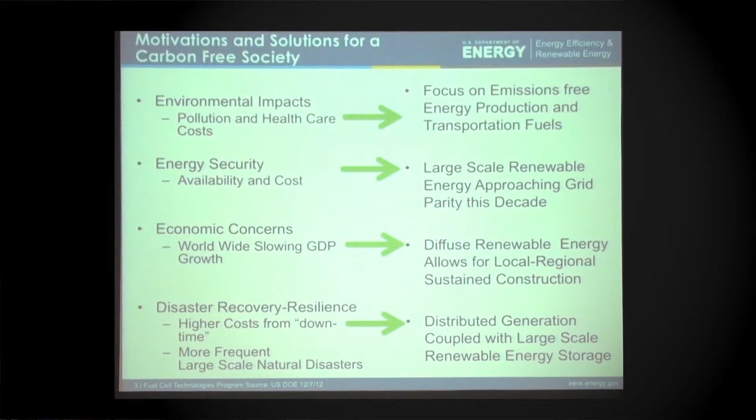Recently, the US has dealt with this as well at a much smaller scale with Hurricane Sandy. We had a couple days where we were out of work at DOE. We had a lot of subways submerged with water in New York, and estimates were upwards of $30 billion in damage. So when you think about disaster recovery and resiliency, it's really important to balance that short-term economic gain with a longer-term view of the future.

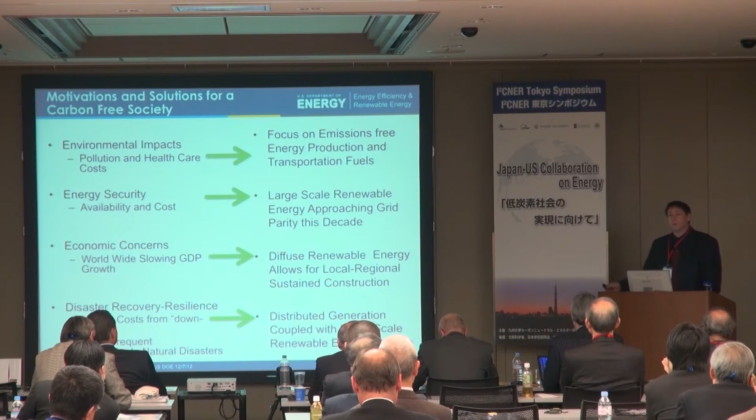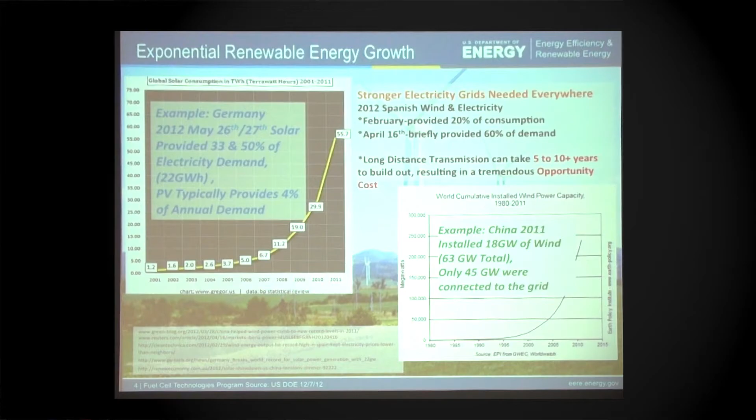Wind energy is growing so fast that it's really difficult to keep it connected. In China last year, there were 60 gigawatts of wind put in, but they were only able to connect 45 gigawatts. So you really need this analysis that's happening at I²CNER, that we're doing at DOE, and I'll talk about this grid integration later, in order to match that growth so it can be as efficient as possible.

But I think as people in this room think about it, there's going to be a lot more headlines about how fast we're moving towards renewable energy.

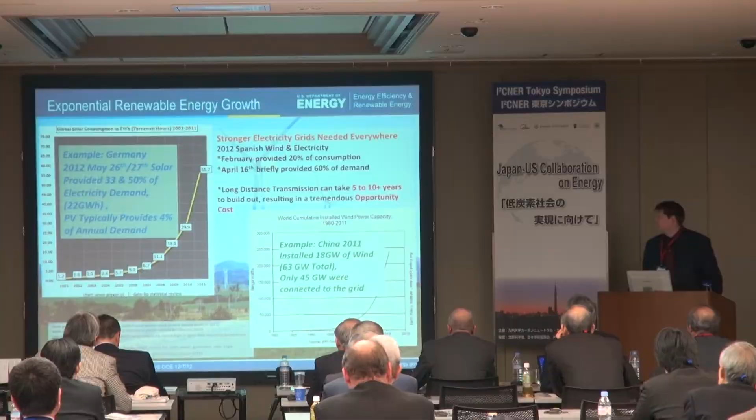In the last 5 years or so within the US, we have a tremendous amount of wind resources in the Midwest, and we've just begun to tap that. You can see here in about 5 years, we've had a 100 terawatt hour increase. This is not capacity where you divide by 5 to get what it actually is—this is real electricity produced. If you were to look at the number of nuclear power plants needed to be built in that same time frame, you'd have 7 2-gigawatt nuclear power plants.

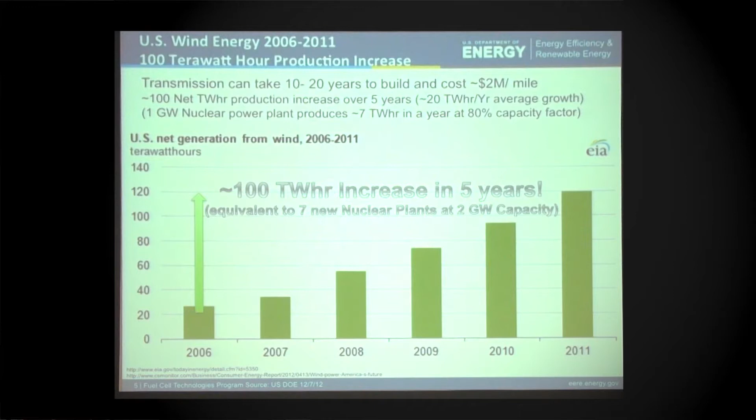I think it's been almost 30 years since we've had a new nuclear power plant, though there are licenses and some going in Georgia and so on. But this kind of shows you the rate that renewable energy can grow when you have just some minor policy support.

So looking at wind in Japan, you can see in Hokkaido there's a tremendous amount of wind. This is a slide from Dr. Ushiyama-san. He talked at this JREF Foundation in March of this year. But if you look at METI's fairly conservative estimate, going from almost 3,000 total gigawatts of potential, down to about 40 or 50 gigawatts—this is trying to understand where can those windmills go, what's reasonable from a societal point of view, if you're looking at offshore and onshore.

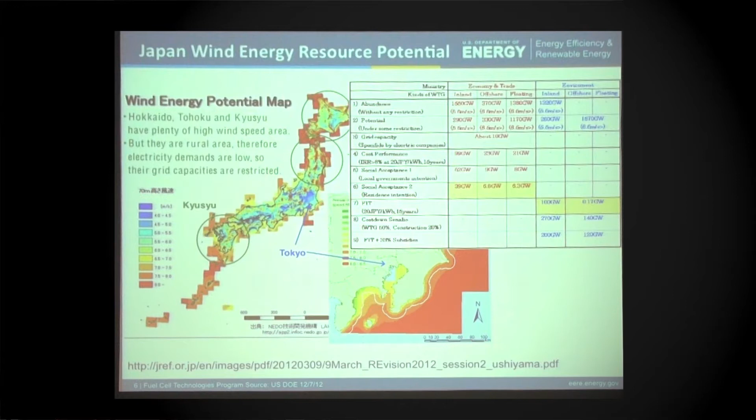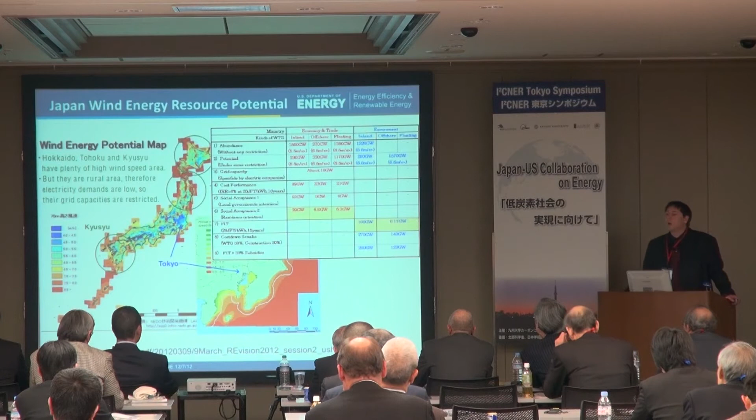And then the Ministry of Environment was a little bit more aggressive, factoring in some of the feed-in tariffs that can really accelerate that introduction, and there's upwards of 300 gigawatts of potential available. So I think Japan has a lot of wind resources. There's a lot of pumped hydro here, more than anywhere else in the world, with 27 gigawatts of energy storage. I think it needs to be considered as there's this thinking about moving towards your energy mix and how you can do it at the lowest cost.

I think in the previous 10 years, there was about a 1% increase in renewable energy, so you're getting a 10 times increase from a single policy that's well thought out. This next few months, it's going to be interesting to see where the cost committee puts those feed-in tariffs and how much they might come down.

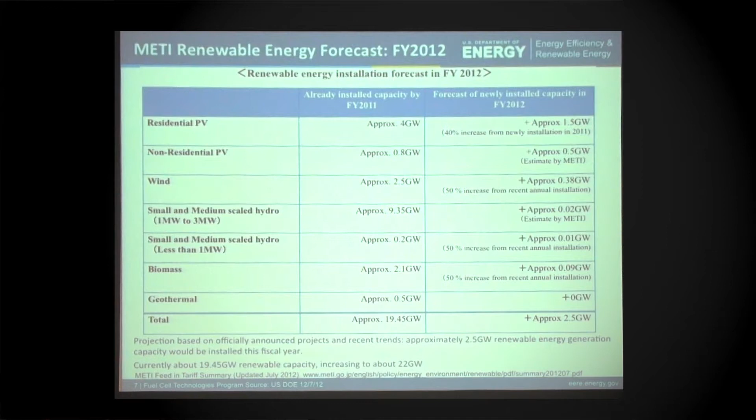You can look at GDP benefits, avoided costs for fuel, but you need to think about how to tally those benefits from renewable energy. It's not just cost—there's tax revenue increases, education, regional development, a lot of external benefits, trade balance, that aren't necessarily calculated when you think about this transition.

So shifting gears, what do we do when we have a lot of renewable energy? Germany just hit 25% for the first half of this year of their economy, and they can't build out the transmission fast enough. As Hiroshi showed, they're starting to look at power to gas, ways to use that excess wind to green their natural gas infrastructure.

So I think hydrogen is one of these options for energy storage. There are many different ways that you can produce it, whether from fossil fuels or renewable energy, and as we saw before, there are many diverse applications. That scalability is one of its strengths and its flexibility, but also makes it difficult to introduce hydrogen—you don't know where to focus, and you don't want to diffuse your funding.

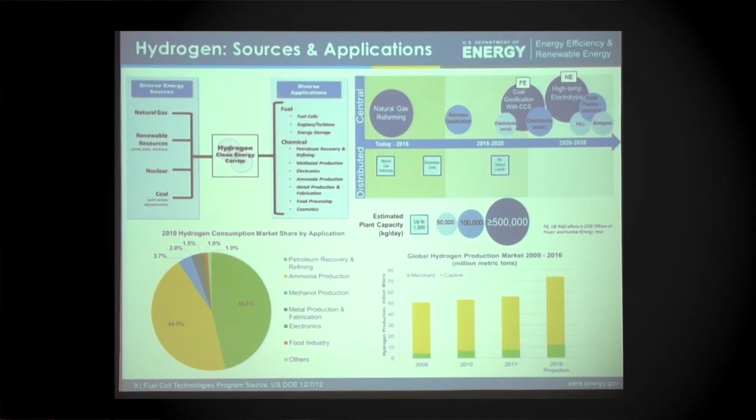Rather than project management, where you're focused on a month-by-month go, no-go decision, program management is trying to figure out where do you want to be in 5 years, where do you want to be in 10 years, and what's the direction of research and technology progress versus your high-level mission and goals.

And I think that interdisciplinary nature was really important, and that's why I looked to I²CNER and what Japan WPI has put together, and how important it is to have that close contact of these researchers with a diverse background.

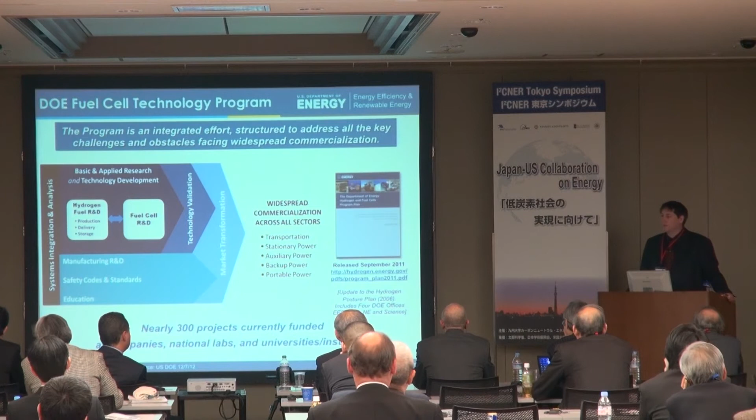And it's very difficult. And I think we're going to be learning a lot in the next year as multiple countries and regions start putting in 100 refueling stations in their respective areas. There's a lot to be learned.

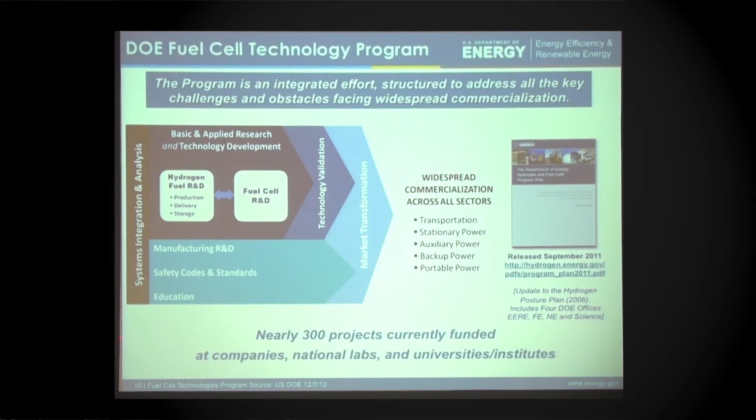This is our updated roadmap and kind of program plan from 2011. So this is available on our website to give an idea of kind of where we're looking at. And this is updated from 2006. We have nearly 300 projects that are currently funded, both at industry, national labs, and universities.

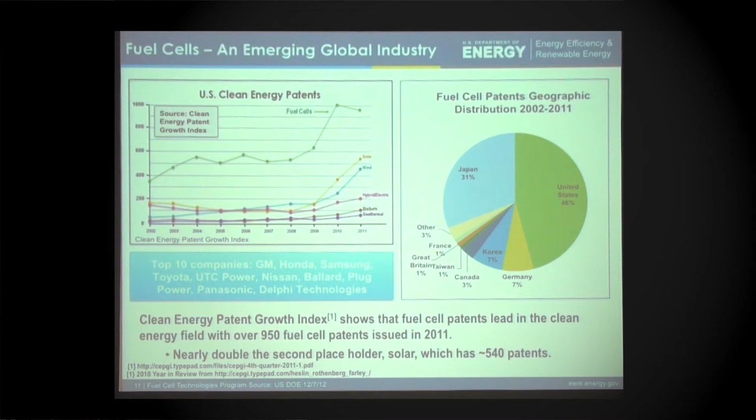This energy policy dialogue, we'll have the 5th one next year. Being able to get our industries to work close together and to move quickly into this space, because the manufacturing ramp up is going to be critical to finding an economic kind of endpoint.

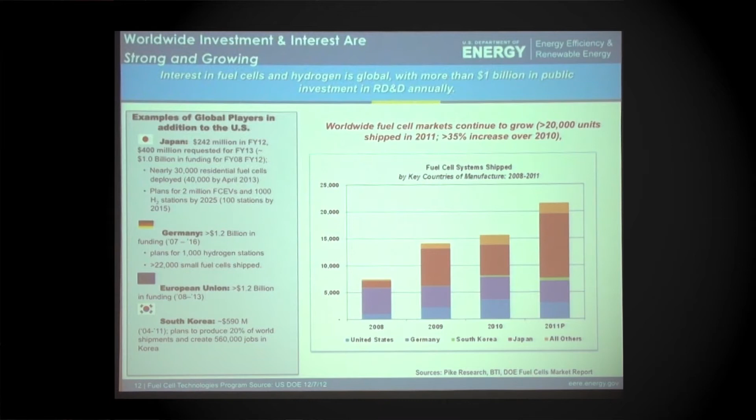One thing I might mention here is one difference between distributed energy generation and centralized production. That central production has a 30, 40, 60-year life. That means that plant, that sunk capital cost, cannot be updated for 60 years. You're stuck with that technology for 60 years.

If your technology has a 10-year life, 20-year life, at the end of that cycle, you can revamp it and introduce new innovations. You can adjust to whatever your society has moved toward. But when you sink money, considerable sums of money into one central place, it's hard to shift. And I think that distributed generation will go faster than people are expecting as you look in the past.

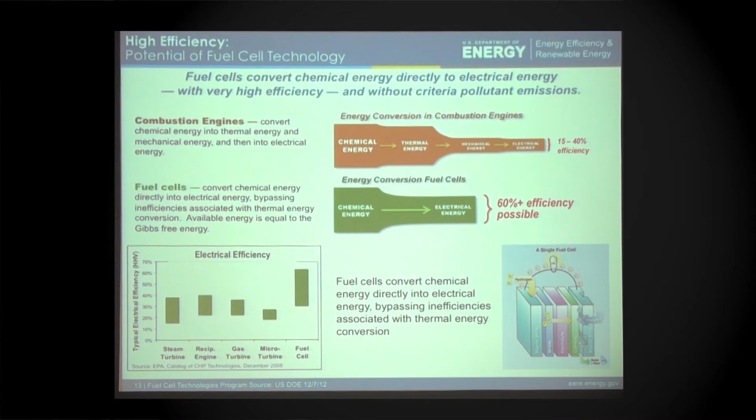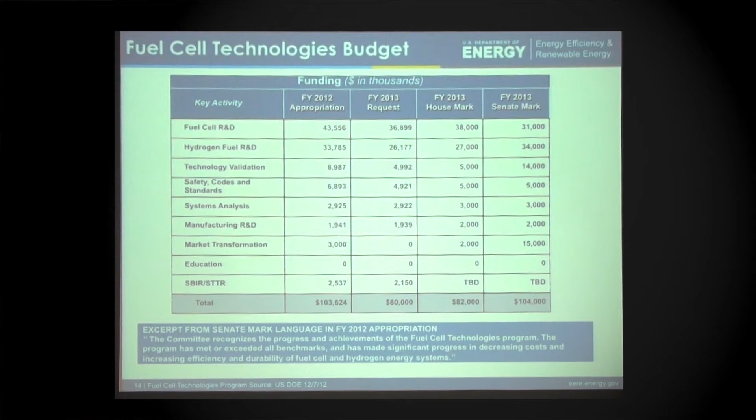You might say, I don't need 1,000 kilometers, that's too far, I never drive that distance. But think about only refueling once a month, and how much time you save over the life of that vehicle — that adds up. As long as you're not losing hydrogen, which is one of the challenges, high capacity is important. Right now we're focused at 5 kilograms or 300-mile range, but if you start thinking about 600-mile range or higher, there's a lot of advantage.

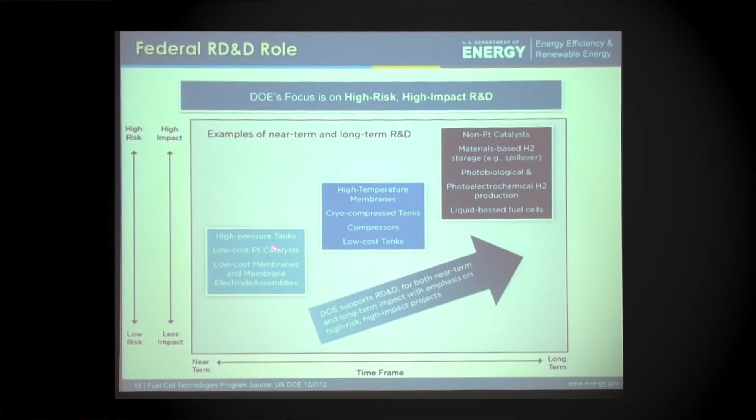This is what customers expect — they want this technology to improve, they're tired of waiting for things to happen. We see that in the battery space with cell phones. How many 5-inch cell phones have come out in the last year, and how many of those can last through a full day or two? We need to find a new way to store energy — capacity is critical, and that's what customers expect.

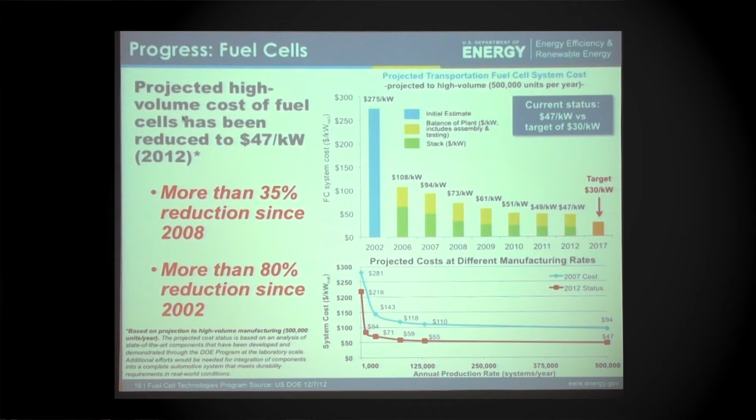I must caution you, this is at very high manufacturing volume — this is not what you can buy a fuel cell stack for today. This is projected with economies of scale built in. But you can see in this lower chart that the economies of scale drop quite rapidly. You can get to 50,000 units and get most of the way down that cost curve. That's why it's so critical to ramp up manufacturing and have all the codes, regulations, standards, and education in place, so you can move down that curve as quickly as possible.

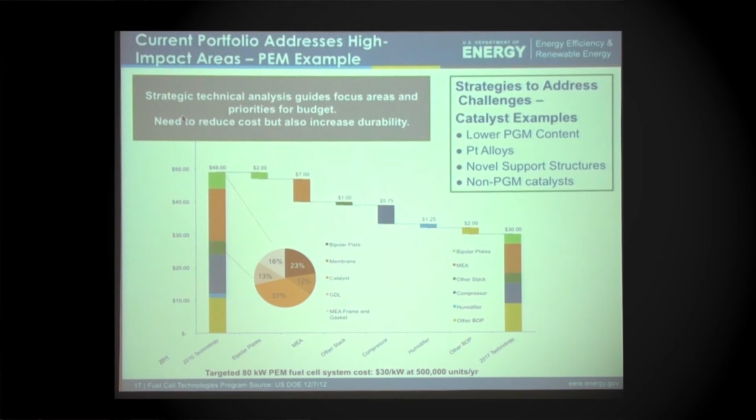Oh, okay, if the mouse will work. There we go. All right. Thanks.

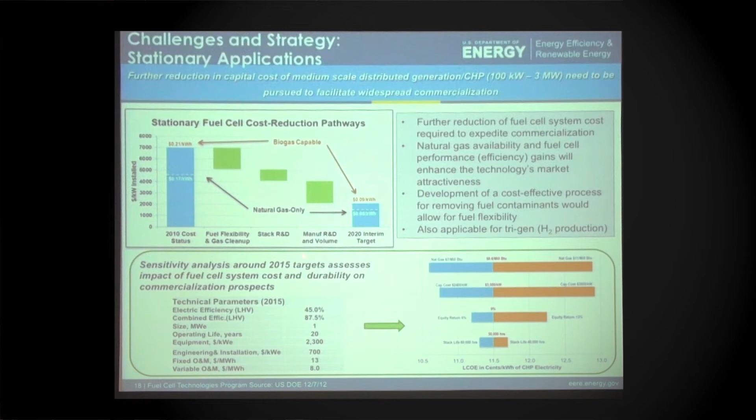I don't think I want to spend too much time on this.

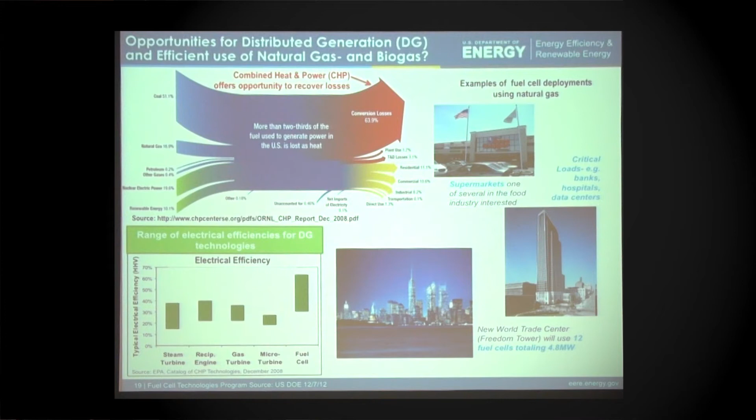After Hurricane Sandy, there were about 23 fuel cell installations in the New York area. Of those 23, 22 of them continued to run, and the one that didn't had a problem with the fan or cooling system, not with the fuel cell itself. So they are proving themselves in the field on disaster recovery and resilience.

I talked about safety codes and standards earlier. There's a lot of information here. I just want to say that this is one of our strongest areas in the program for sharing information. We have an h2incidents.org database.

This is where industry stakeholders, auto manufacturers, and station providers can share information. If they have a problem with the station, they don't have to say who they are or where they are, but they can say this is the kind of issue we had, and this is what people putting in new stations should think about.

So I think it's really important to have a place to share information that's vetted and that has this kind of cross-border reach, because no country can do it alone. It's costly, and we need to accelerate that introduction as quickly as possible. And that happens through collaboration and learning.

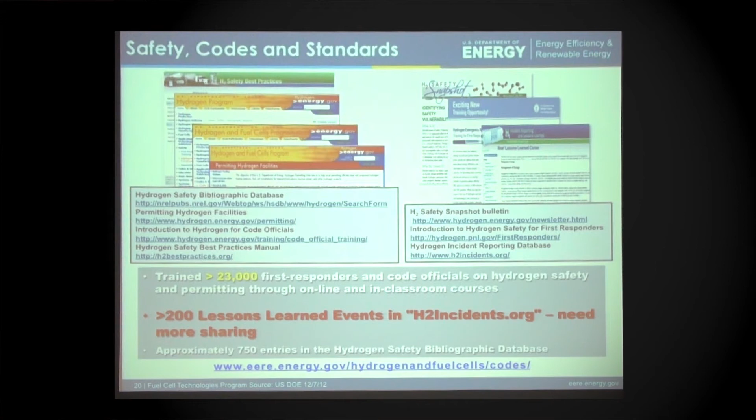California, just a week ago, released about $30 million for station solicitations. So California is very focused on putting in refueling stations, and they've coupled that with a sustainable policy that has tax revenue that doesn't need to be approved year to year, so that introduction of stations can continue.

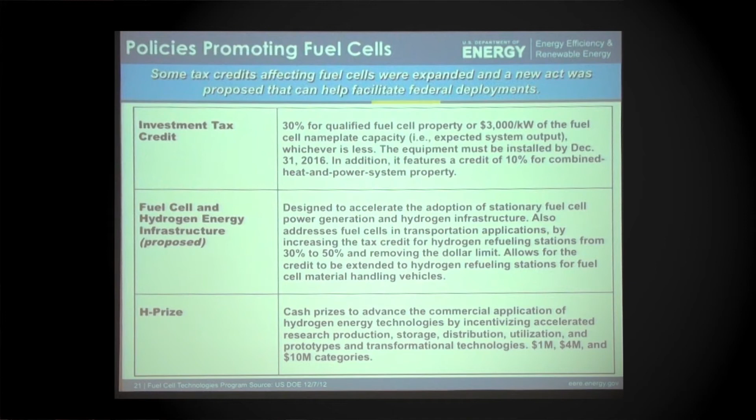I don't think I have it on this slide, maybe a following slide. But we have, I think, well it'll come up on a later slide. So this is really important: how do you choose where your fuel cells go? How do you prioritize your research funding? You need to understand where you can reach those economies of scale as quickly as possible.

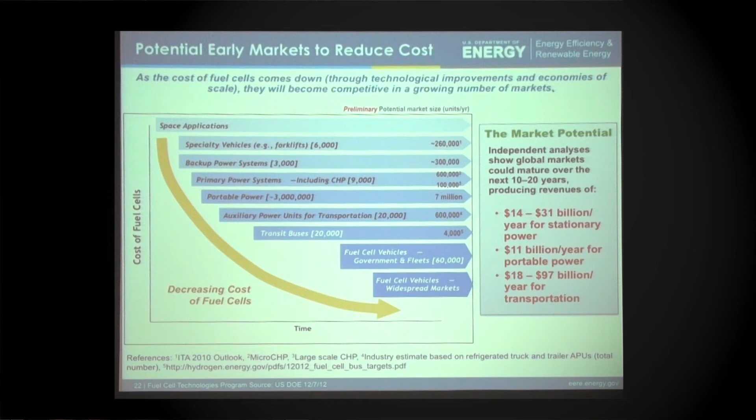After we did that, we had more than 5,000 purchases come in, about 4,000 or so that had no government incentive—they didn't have any funding from that Recovery Act. So this is a home run that we hit, that we just got lucky in being the sweet spot. We have the market pull right after the government just puts a little money into this and shows that it can work, which helps with the refueling station introduction.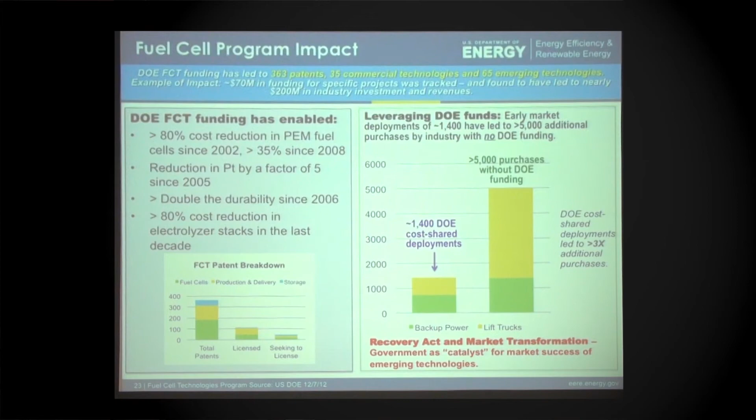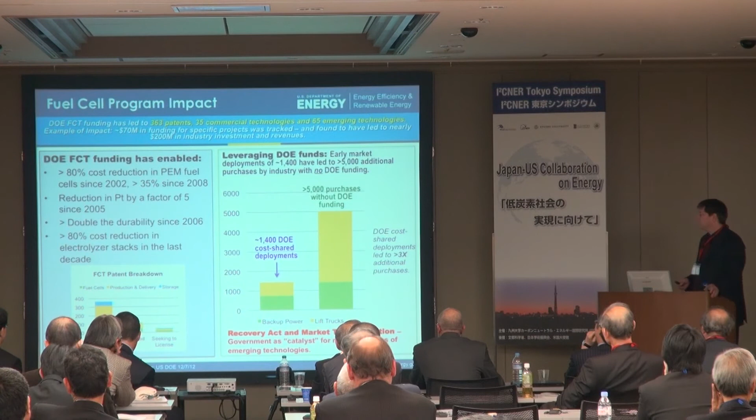A lot of meetings on indoor refueling, a lot of concerns on tank cycling. They had these tanks rated for one or two fills a day, or maybe one or two fills a month or a year, and they were refueling these tanks three times a shift. So what does that cycling, that embrittlement do? Sandia was critical, and I'm sure Dr. Sofronis consulted on that, but it was an enormous project that ramped up very quickly to solve this problem.

Because we knew this deployment was happening so quickly, there's a lot of US collaboration going on. The International Energy Agency has a hydrogen implementing agreement, with about 17 countries, or maybe more, working to varying degrees on hydrogen. We also have this international partnership for hydrogen and fuel cells in the economy. We just went through 10 years of this partnership, and we're renewing it for another 5 years. I was in Seville a couple weeks ago, and Japan took over leadership and chair of that organization. I think it's so important to see what Japan's done with vehicles and residential fuel cells, really pushing hydrogen, and other countries wanted Japan to take that leadership role and share what they've learned and how that might transfer to accelerating introduction. We have memorandums of agreement between NEDO, I²CNER, LANL, and many other national labs.

Infrastructure is going to be critical moving into this year, with multiple countries looking at tens or hundreds of refueling stations going in. Two weeks ago in Spain, we had an energy storage workshop in conjunction with IPHE, and it was amazing the level of detail and expertise in Europe looking at cost analysis, not just batteries but compressed air, different ways to store that energy. They have a lot of energy coming into the grid, and it's difficult to manage. There's only so much you can do with demand response and a strong mesh grid. At some point you need to think about energy storage, and I think large-scale energy storage is going to become a really important topic moving into the next several years.

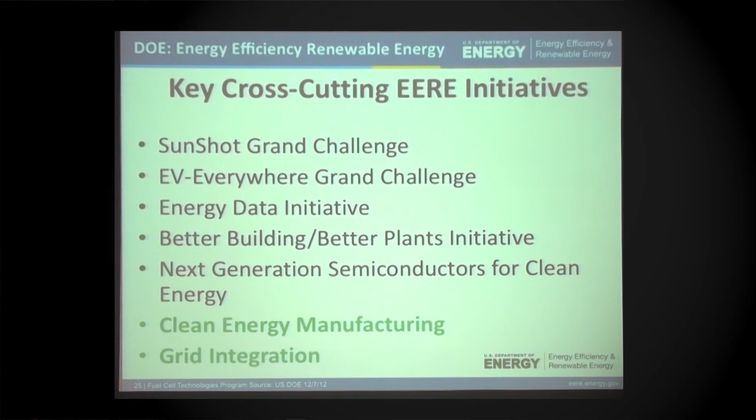There's a lot of work and learning to be done. If you have a static central power plant, whether it's nuclear or coal, you have an uptime of 2 gigawatts that can be turned on over a day or two or less. That runs for 3 months or however long before you need to do your inspections, and then you shut that 2 gigawatts down. So how do you manage a 2 gigawatt drop? We know how to do that really well. That's what utilities have been doing for the last 100 years.

But now we want to think about wind energy and solar energy. It's got a daily cycle. You might have a 3-month cycle where that energy is going up by gigawatts, not just a couple. But if it's distributed, maybe you can turn these on here, do maintenance in a small area here and there. But how do you transfer those learnings and how that industry best operates to a utility which is very conservative? They are required to have 100% uptime with extreme reliability, and how do you mesh this variable energy source with this requirement for 100% uptime?

There's some interesting work at Siemens where they took about 5 different resources - I think it was natural gas, wind, maybe geothermal, and a few other items - and they were able to create a virtual power plant. It was an 80 megawatt power plant. By using weather forecasting and grid control, they were able to operate that just like they would expect a conventional power plant to operate.

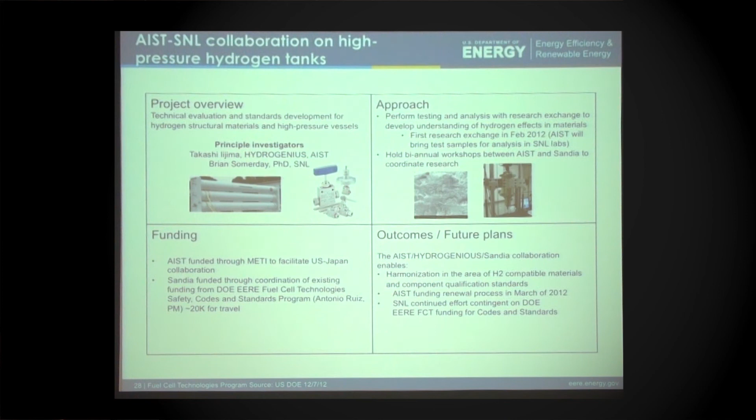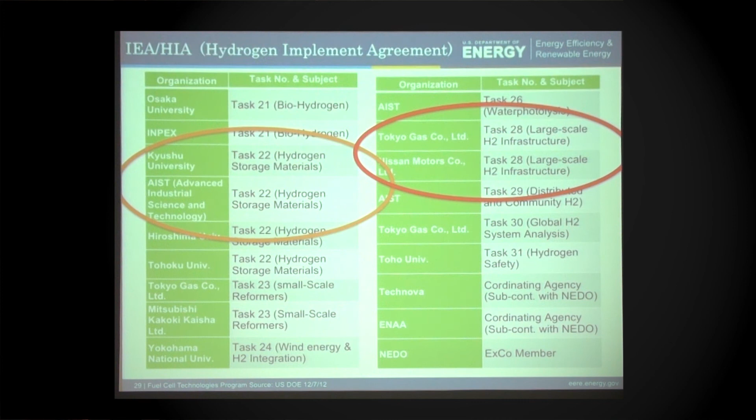This is Task 28, which I helped start with Marcel Weeda from the Netherlands, and that'll be coming to a conclusion at the end of this coming year. Tokyo Gas and Nissan have been really valuable in providing input and understanding how we build out that infrastructure - what's the most efficient options for getting hydrogen from production to the vehicle at the lowest cost.

There's a lot of information out there, it's just a matter of how you get it publicized. And then we have this global hydrogen system analysis, Task 30 - I think this might have been mentioned earlier.

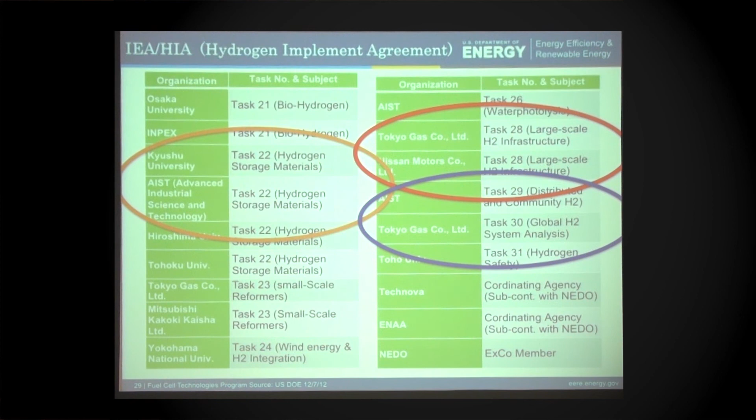Where's the hydrogen going to come from? There's a really in-depth analysis going on through the IEA and working closely with the IPHE to understand where natural gas is moving from, where coal is moving from. I don't see the coal to Japan and China data here, but this overview helps in understanding energy flows in the world from these different primary energy sources.

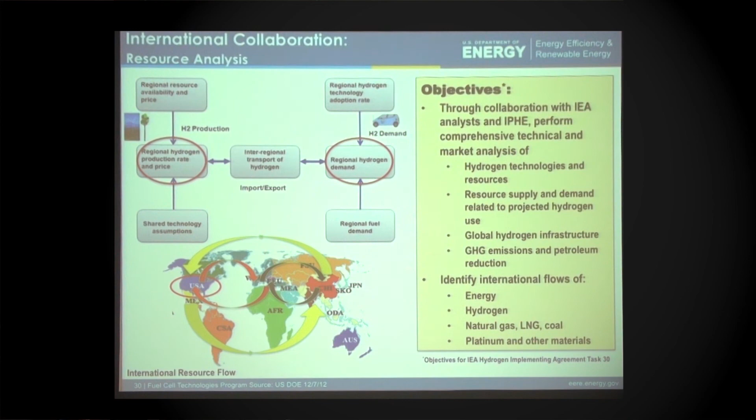Just for example, with low-cost natural gas, we're at a historic low cost of $2 a million BTU. Meanwhile, it's upwards of $15, $20 a million BTU for LNG. Of course, there's some energy and transport cost added for that in Japan and Asia.

But what happened is the US, over a period of just 5 years, had to go from gasifiers on our coasts to considering liquefiers. There's going to be a natural gas LNG report released from DOE this week for public comment, so I know Japan is very interested in understanding when that import can start.

But what happened is we stopped importing natural gas from the Middle East. That freed up natural gas in the Middle East to go to Europe. That depressed prices there, putting pressure on Russia. So it's not just one country and another country, but there's a domino effect as you think about the flows of energy. I'm in no way an expert on this.

I'm just repeating what I said, but you can imagine this for a hydrogen society, or hybrid, where you're looking at this hybrid of electricity, energy storage, renewables. It's very difficult to think about where this energy will come from and what's the best path forward.

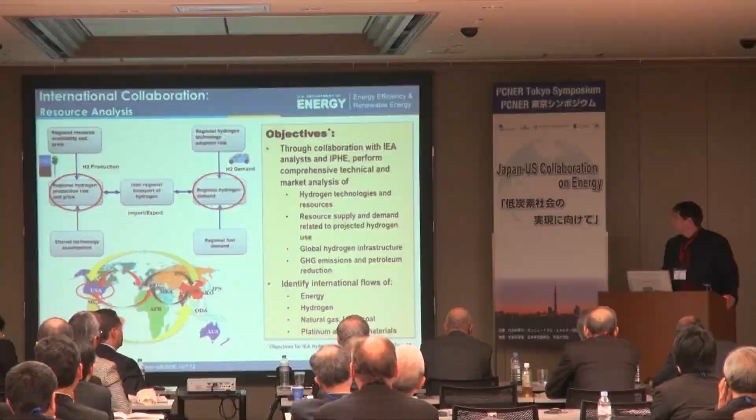I think I'm just about over. You can see we have to do a lot of work with other agencies. We have, just now, a biofuel credit, and we're looking at whether or not hydrogen can be part of that. Pete Devlin has been really critical in leveraging resources from other agencies. DOE can't do it alone.

It's not just the hydrogen program that's going to do it. It's going to be the Department of Interior, Department of Transportation. We actually have somebody from Department of Transportation working in our group now, 20% of his time, to help out managing safety codes and standards. And that shows the kind of collaboration needed, that it can't be done alone.

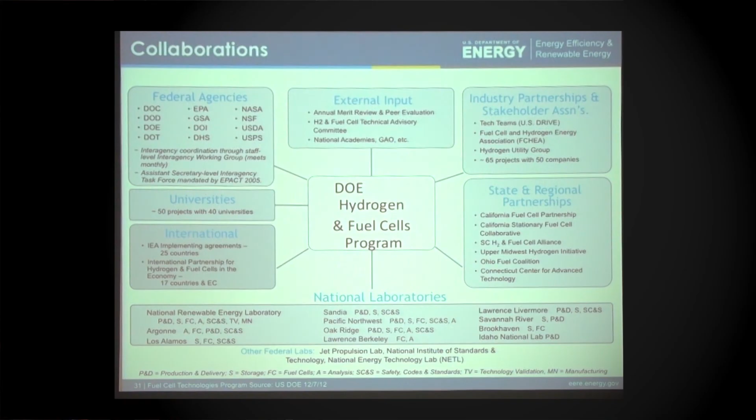I was talking to METI just yesterday morning about what do we do with safety. We want to share information on safety codes and standards. Maybe we want to understand how foreign fuel cell vehicles can come into Japan. They said, we hadn't thought about that, but safety is not what we do, we do hydrogen policy promotion. You need to go to the 3rd floor and talk to KHK.

So I think in March, I'm going to try to start that dialogue and try to understand where DOE can help, where we can start new collaborations. So thank you for letting me go on for so long. I don't see too many people sleeping, so hopefully I kept you guys awake and that you learned a little bit here. I'm always open for questions.

We have our annual merit review coming up in May. Actually, on Monday, NEDO is holding its annual review for hydrogen and fuel cell technology. And I think, probably for the first time in history, they'll have a US employee there, myself, to say a few words and help review projects. So I think this is an example of this collaboration moving forward.

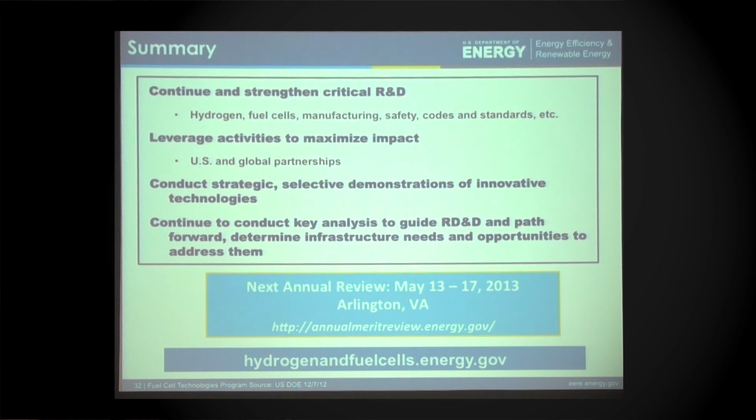For the last 10 years plus, we've had this hydrogen review open to researchers from all over the world. We have 1,000, 2,000 people come for these reviews. And now it's an opportunity for us to come and share knowledge and to work closer with Japan. So thank you very much for your time, and here's my contact information.